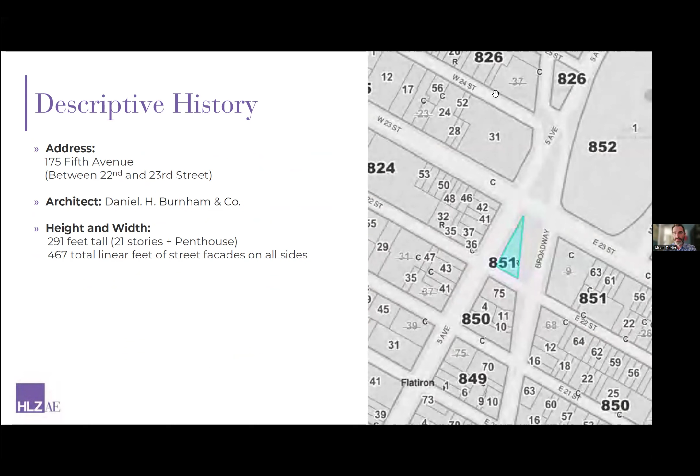I'll walk you up the building from the ground floor and talk about the materials. The first 3 floors are a limestone plinth course, which then give way to terracotta. There is an extensive amount of terracotta ornamentation on this building. It's in the form of lintels, sills, jambs, medallions, spandrels, keystones, and water tables. You can see the terracotta here.

In addition, the Flatiron Building does have quite a lot of brick. Most people don't think of the Flatiron Building as a brick building. It really doesn't read as a brick building from the street. It reads as a stone building or a terracotta building, and that was the intention of the original architects. Terracotta was actually created to mimic hand-carved stone.

Basically, when America was exploding with construction, we needed to build buildings fast, and we wanted them to look nice. In lieu of going to a quarry and pulling acres of limestone like they do in Paris, they went with terracotta, which mimicked the look of stone. Even further up the building, they did the same with brick, so the brick pretends to look like terracotta, and the terracotta pretends to look like stone.

Once you get to the 17th floor, it does go back to 100% terracotta, and that terracotta runs up to the 21st floor, which has the cornice.

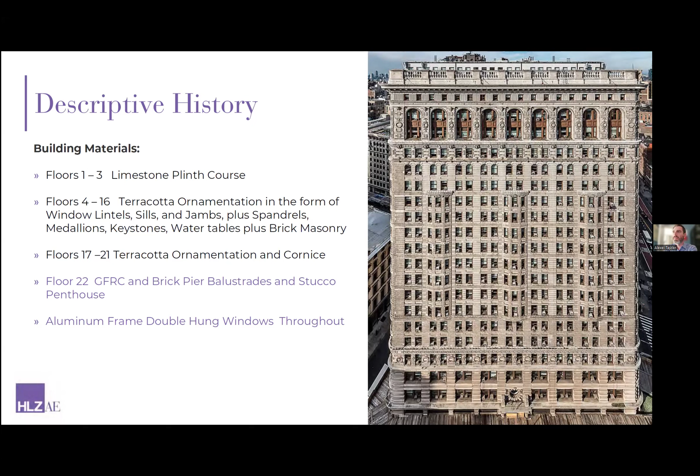At the very tip of the building, we have a GFRC brick pier and balustrade combination, and then a stucco penthouse, which you can see here with my cursor. Throughout the entire facade is aluminum frame double hung windows. So starting from the bottom, we have limestone giving way to terracotta, then terracotta and brick, then back to fully terracotta, and finishing with GFRC and stucco. A wealth of materials is present on this building.

In 1966, one year after the Landmark Preservation Commission was formed, it became a designated historic building. They found that it had special character, special historic and aesthetical interest, and value as part of the development, heritage, and cultural characteristics of New York City.

They said that, among its important qualities, it's an interesting example of an early steel frame skyscraper built on an unusual triangular site that, due to its prow-like effect and its northern end, creates an impression of great slenderness and height, displaying a wealth of ornamental detail representative of the time. Although a utilitarian office building—I love that line, a little bit of a slight, right?—it has inspired outpourings of almost a poetic quality.

The building itself has been an office building for over 120 years. The early tenants were the Equitable Life Insurance Society and the Imperial Russian Consulate, so it really dates the building there. In 1945, it was valued at $1.05 million. It's managed by Helmsley-Spear. The major tenant at this point was Macmillan Publishers, who were there up until 2019. In 1991, a restoration program was undertaken, and in 1997, Newmark and Company bought out Helmsley and did even further upgrades and improvements.

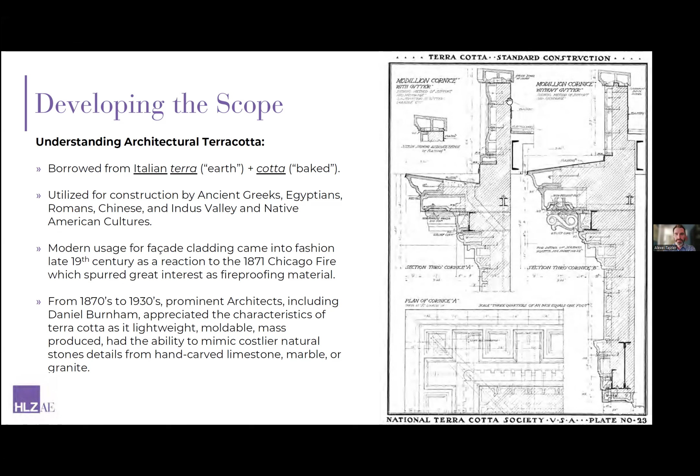So why does it fail and why do we always hear about it? Well, the sad truth is it's actually not the terracotta's fault. If you took that same clay pot from pottery class and put it in your backyard, and returned 10, 15, 20 years later, it would probably still be there in very similar shape. The issue is that terracotta needs structural support to be installed and stay on buildings.

And that's commonly done with iron or steel systems. At the turn of the century, really up until the 1950s, we weren't really waterproofing our buildings. We were just putting in steel, maybe painting the steel at best, and that was it.

So when iron or steel rusts, its members concurrently expand and weaken. The expansion is called rust jacking. What happens is the steel or iron, which is much stronger than the terracotta, gets larger and starts to push on the terracotta.

And after many, many freeze-thaw cycles, which we have in New York City all the time, it continues to be a problem to the point where eventually you get a crack, a little hairline crack, and then water gets in, freezes, that hairline crack gets bigger and bigger, and ultimately you have spalls that fall off the facade and land on the street or other building surfaces. Then we're into a public safety issue, which brings us back to FISP.

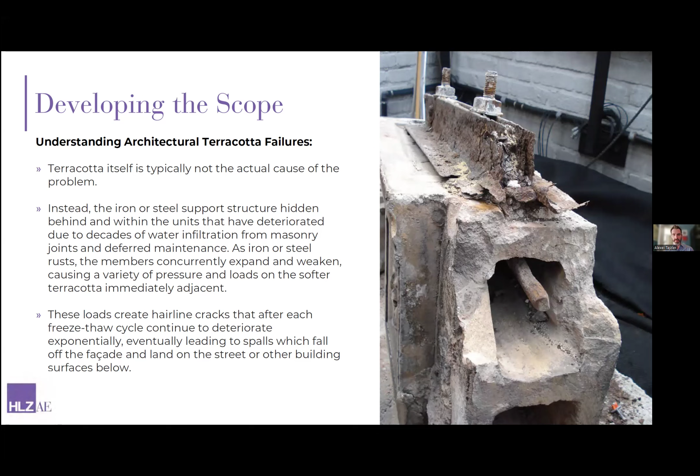So here are just some early photographs from the initial inspections. You can actually see the rope for the rope access inspectors in some of these photographs. You can see here, this is up at the very top of the building, this is the cornice.

We are always nervous about these types of cracks because the fear is that as these cracks grow, the triangles meet each other, and then you ultimately get spalls of a corner piece falling. Here is a previous crack that was done probably in the early 90s that is returning.

Here we have patches that have spalled out. This is the foot of the inspector - there is nothing between the foot and the street in this photograph. Here you can see stones, very highly ornamental stones, and kind of more plain stones here on the returns. Both have been patched many, many times before and are starting to crack again.

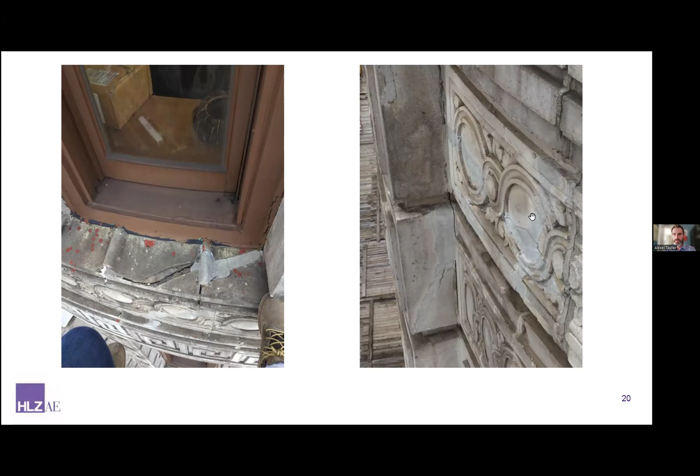And then at the brick, you have spalled brick masonry. Brick is a wonderful product, always has been. The issue is that the mortar joints are porous, and once water gets through the joints, they can sometimes be trapped and cause the brick face to spall. You most commonly see this on white brick buildings built in the city in the 40s, 50s, 60s, 70s that are glazed and are even worse.

And if you look at a lot of white brick buildings in the city, you will see a lot of brick repair being done continuously, also due to FISP.

And then here at the base, this is part of the limestone. You can see there are some metal anchors that were originally installed for awnings, for sunshades. They were left in place. And if you leave a piece of steel in a facade long enough, it will rust. And as it rusts, you can see a perfect example here, it will cause the surrounding masonry to crack. And that will only continue until they are addressed.

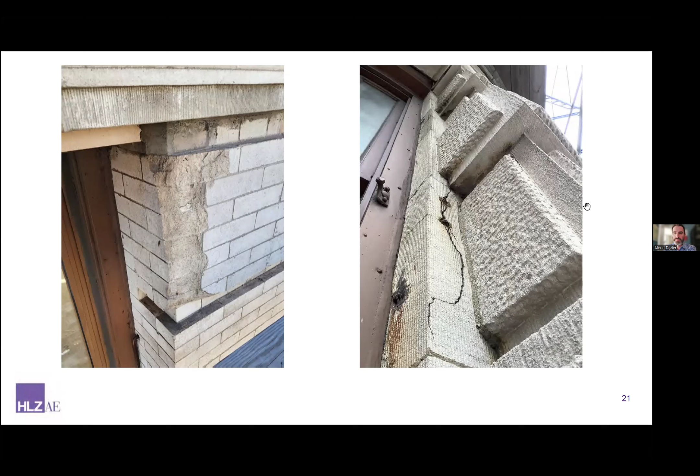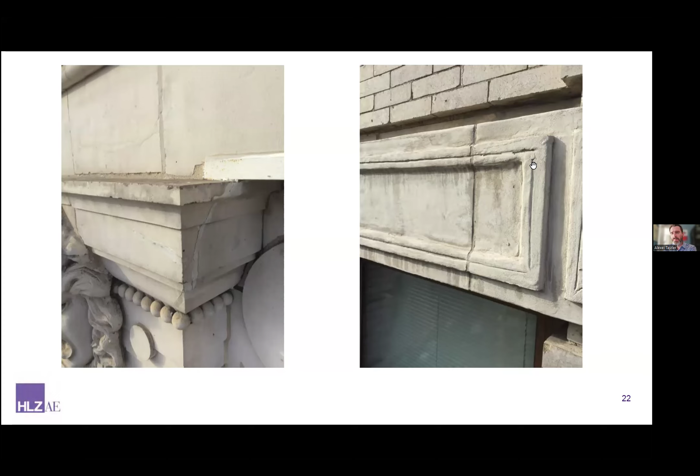Some other previous patches, crack repairs that were done, some steel supports that were added. This is kind of a smear coat to try to mimic the stone that was there. Not the best looking one.

Again, it's the facade. The Flatiron Building was just full of examples of this over and over again. Previous repair is done, and then another crack appears.

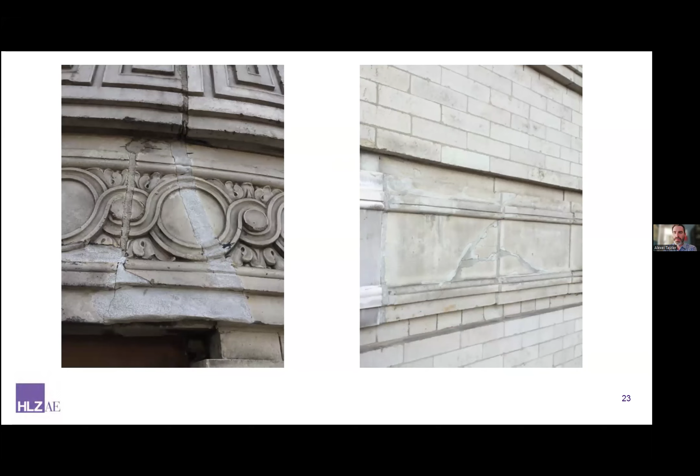Now you can kind of see where it would fall. It would fall a couple hundred feet onto the street, which is something that none of us want.

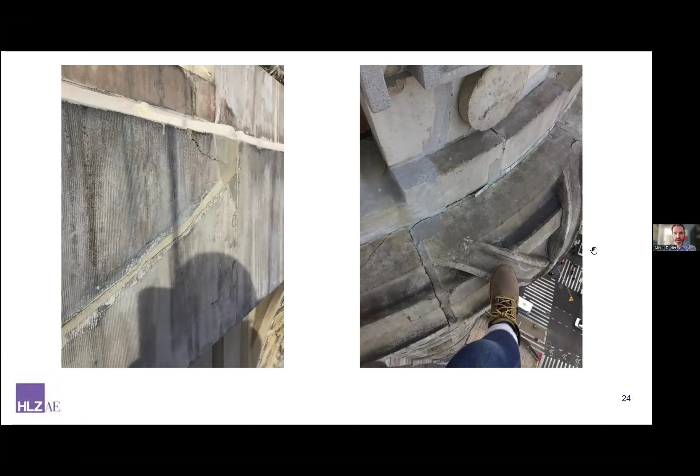And then at the very top of the building, we have the GFRC, which is also starting to show some cracks and some spalls as well.

So we have all these photographs, all these inspections. Now we have to move into actually developing the scope to the point where we can file with the city and bid it out to a contractor. In the industry, we call these construction documents, or most commonly CDs. They set forth requirements of the project. They include specifications and drawings that establish quality levels for the materials and systems.

We also created the bid breakdown, which is 50 independent line items over 134 pages. Our scope had no work on the windows or the storefront, though those are also being done by another consultant.

Once we had the CDs done, we had to file the projects with both LPC and DOB. We competitively bid it out to a list of qualified general contractors that work in the exterior restoration sphere, and ultimately AWR Group was awarded the project in spring of 2019.

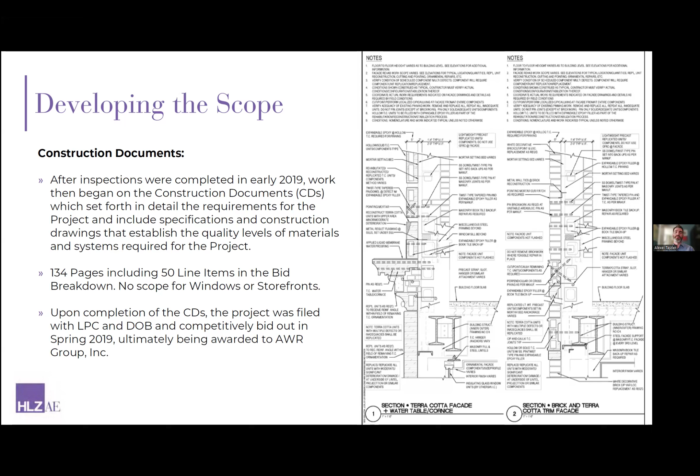So now we have a contractor on board. We can really start mobilization. And that first step is to put up pipe scaffolding. Again, everything before this was just done by rope access every 60 feet or a few little spots here. Now that we have pipe scaffolding plus some suspended scaffolding, we're actually able to look at every square inch of the building and really get an understanding of what is going on.

Our bids are built with allowances based off of our best guess and estimates with some contingency, but nothing replaces actually being on a building and being able to look at every square inch. So in order for us to keep track of that, we had to divide the building into a grid of individual facades, which I will get to on the next slide.

This task involved 15 employees across HLZAE, which had architectural, structural, and special inspectors. And then we also had developed an on-site field office, which was in conjunction with the general contractor, AWR, and Gladding, McBean, who was the terracotta vendor.

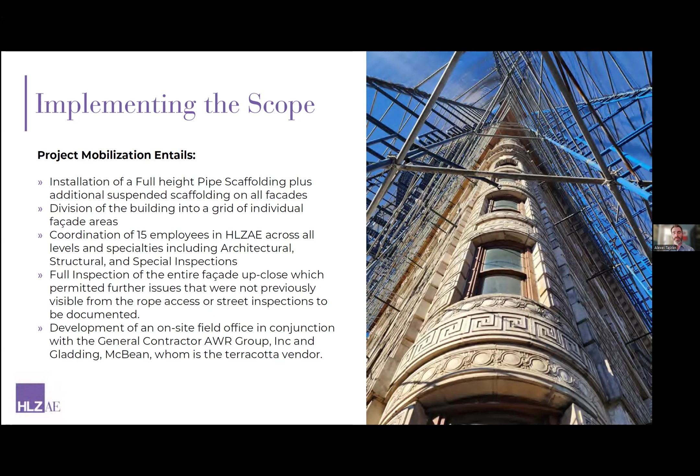And we have tablets that we use in the field. We mark a certain area that needs a tag, whether that's crack repair, unit replacement, sealant replacement, etc. And that is geo-tracked in software called PlanGrid, which is connected to the cloud so that we can look at it anytime at home, in the office, back in the field with contractors, with the client, etc.

As of today, we have 9,504 individual tags of some type of repair, and that includes nearly 3,200 individual terracotta units being replaced, 25,000 linear feet of masonry joints being repointed, and 2,000 linear feet of crack repair, among many other items.

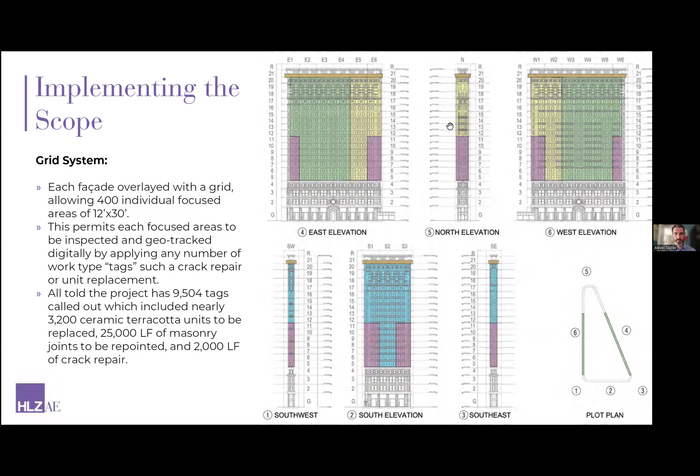So here's the pipe scaffolding. You can see this is along Fifth Avenue. You can see the kind of conditions that the inspectors and workers have to deal with. I always joke that this is an adult jungle gym. At the end of the day, stepping over these things starts to get a little hard on the legs and back, but this is the reality we have to deal with.

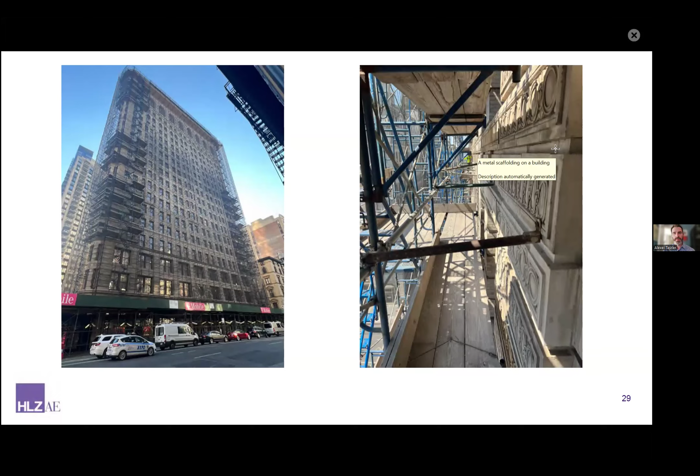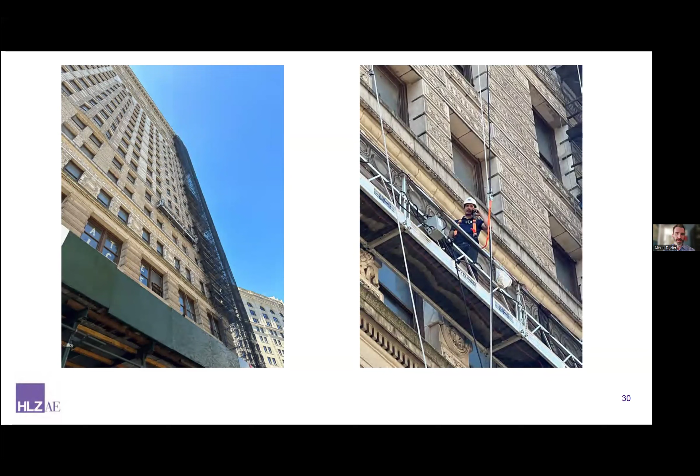Now, while we're on the building and can finally look at everything, we're able to do sounding. Sounding is commonly done with either a ceramic or rubber mallet, and we hit the stones with human force, and we try to register what we hear in comparison to other stones. It gives us an extra layer of knowledge and information that's beyond just the superficial, like a crack. Sometimes the stones even shift, which lets us know the stone is unstable and that the steel or iron straps behind are a real problem.

So a lot of times you have to do exploratory probes and find out things in real time. What is exactly going on? What was done before? Why is this failing? Why is this leaking? That's all part of the process once we have pipe scaffolding up, so we can safely open very large areas without fear to the public.

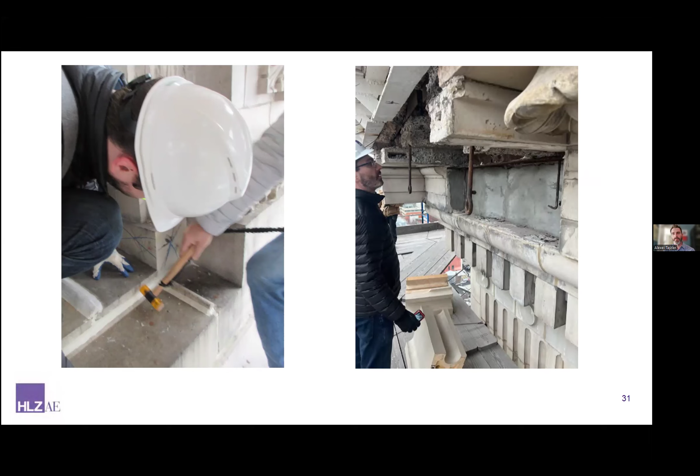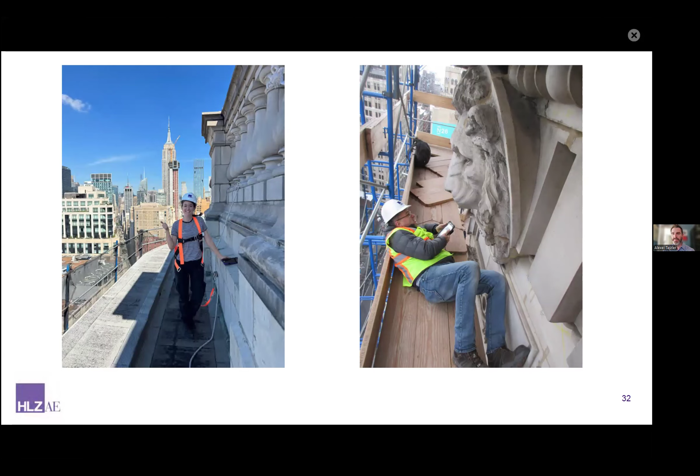So going back to terracotta, in a typical historic building, LPC passed rules that anything above the 6th floor, you can actually use replacement materials. Those are most commonly architectural precast, glass fiber reinforced concrete, which is called GFRC, or fiberglass. This is in part because there are only 2 vendors domestically, Boston Valley near Buffalo, New York, and Gladding McBean, which is near Sacramento, California.

They are the only 2 vendors domestically that can produce architectural terracotta with the trade knowledge and capabilities. So despite the fact that the Flatiron Building does have terracotta above the 6th floor, LPC still mandated that all unit replacement needed to be done in terracotta. We were not permitted to use replica materials, given the special architectural and historic character of the building. So it's sometimes a little bit of a double-edged sword. When you have a beautiful, famous building, you've got beautiful building and famous building problems as well.

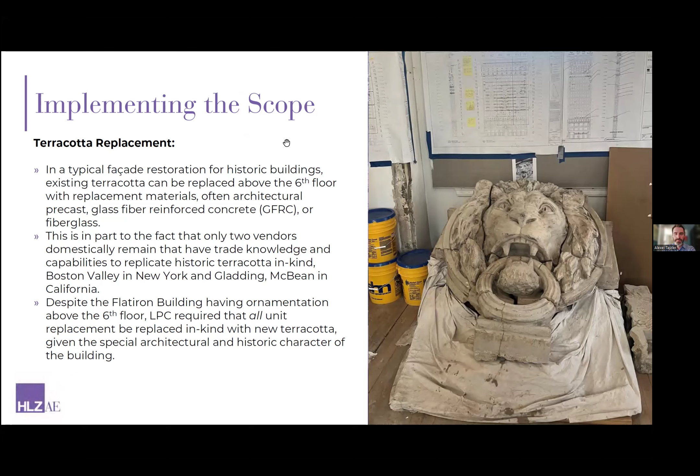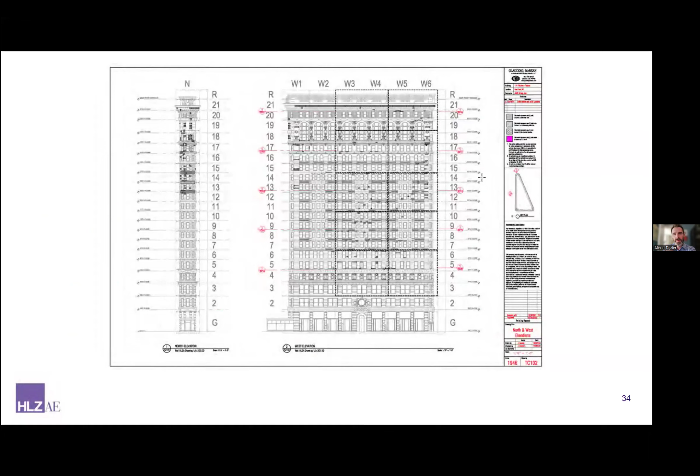So here are the shop drawings. Again, we're going back to the grid. You can see this is the west facade, all the floors. And when you break down the shop drawings, you can see just how many individual stones there are. Everything that is shaded is a stone that needed to be replaced. There's no pattern to it. Some floors are much better than others, and we have to go grid by grid.

Now, how is that done exactly? As much as the contractor would love to just take a jackhammer to this and get it going, he can't. We need these stones, because we need to replicate them exactly, not only the face, but also the backup, the webbing, the depth, all of that. So they are carefully taken out piece by piece so they can be measured and sent to California to have a mold done. I'll get into that later.

But the stones themselves, while they do have the steel support system, also support each other up and down with dead loads and side to side with lateral loads. So we can't just remove them and call it a day. We have to carefully shore the stones above so we're not causing further damage by replacing one stone. In addition, as I mentioned before, this building has no waterproofing.

These buildings, very common in the era, were called bonded masonry buildings, where basically the architects, developers and contractors would build a wall thick enough with the hope that any moisture or rain that came in would eventually evaporate before it made its way into the interior spaces.

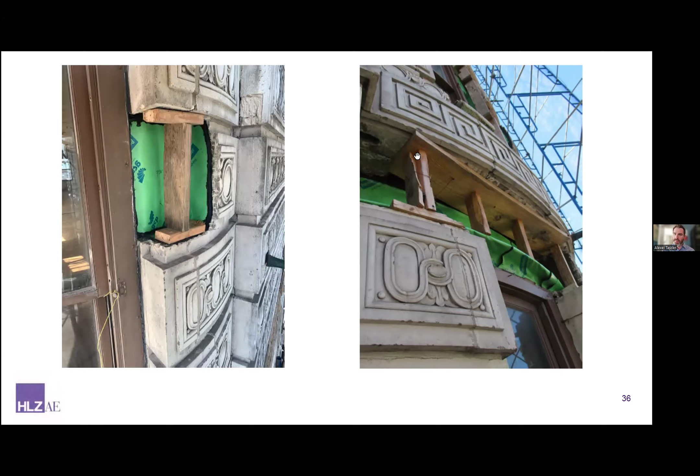By removing the terracotta, we have completely removed the main obstacle for water coming into the facade. We don't want to make the building any worse by doing this project, so we have to waterproof with peel and stick membrane, done at every location of the 3,200 stones we've taken out.

Here's our field office. You can see some shop drawings, and that's one of the lion's heads there. There's some materials. Because it's converting to residences, I like to think that this is probably the last office the Flatiron Building will have, which is a little bit bittersweet, but it's quite the honor.

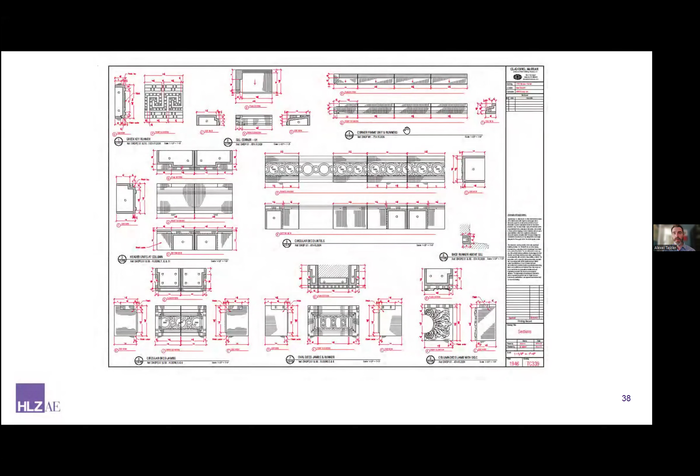Here are the shop drawings. You can see just the vast variety of styles, types, sizes of stones. These are kind of more flat fascia pieces, then we have some at the columns. Some are very ornamental, some are very decorative, some are not exactly 90-degree pieces either. We've got some radial columns, some concave, convex pieces, water tables, rosette stones, sills, lintels, etc. It just continues. Every inch of this building has something a little bit different, and each one has to be matched exactly.

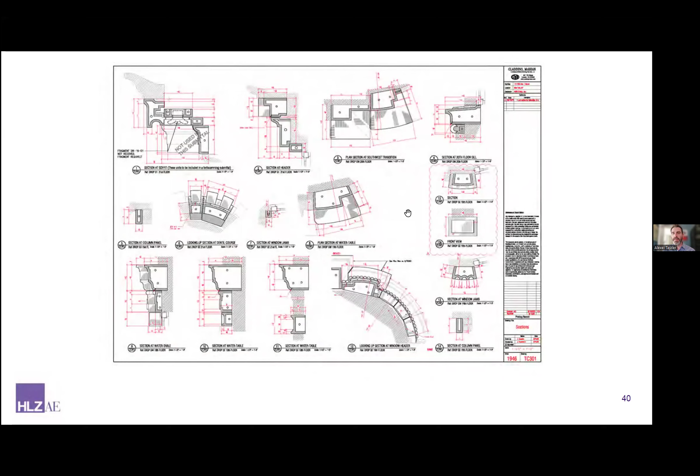Once the stones are cured, they then follow a QA/QC process to make sure they meet ASTM specifications and standards. And then the big issue is that due to industry backlogs, high demand and short supply, it can take 8 to 18 months to receive a single unit from when we first call it out for replacement. This is a major problem within New York City and elsewhere, and it's all because there's just 2 vendors left, and the lead times are extensive.

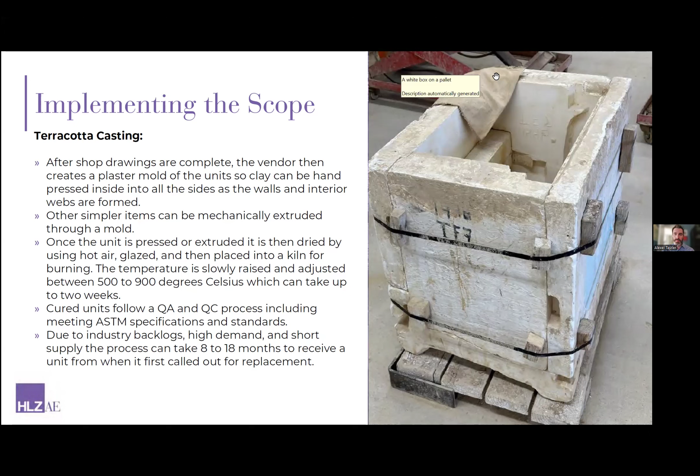And if you go with substitute materials such as precast, fiberglass, or even GFRC, you can get that locally, and we're talking a matter of weeks versus months. So unfortunately, with the Flatiron Building, as before, we have to go with terracotta.

So while that's all going on, we are still working. We're still doing architecture and engineering. The primary focus at this point is we're taking out the stones. How do we put them back in? How do we make sure that they are fully supported? We're not going to use the original iron straps that have all rusted out. We have to come up with modern technology.

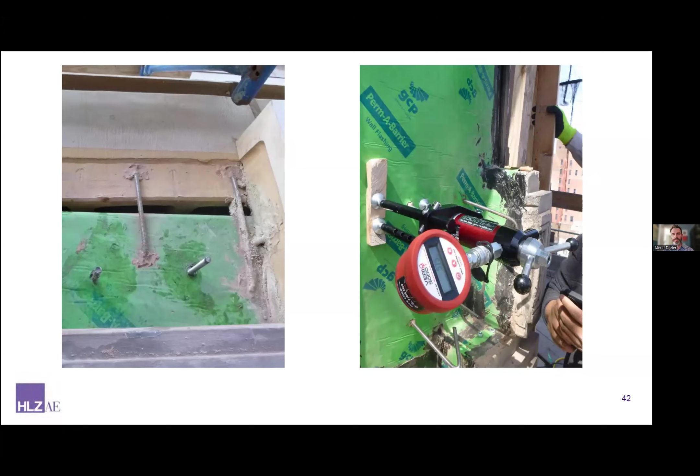We're also working with the vendor and landmarks to make sure that we are matching the stone as best we can. It's very difficult to match existing facades. I'm sure if you walk through the city, you can see where repairs have been done. The harsh reality is that even if you found the exact same stone from the exact same supplier, that stone hasn't been sitting outside in New York City for 120 years. So it'll be aged in its own way. But we do the best we can. We look at direct sunlight, indirect sunlight, shade, etc. Try to match the texture, any of the aggregate speckles as well.

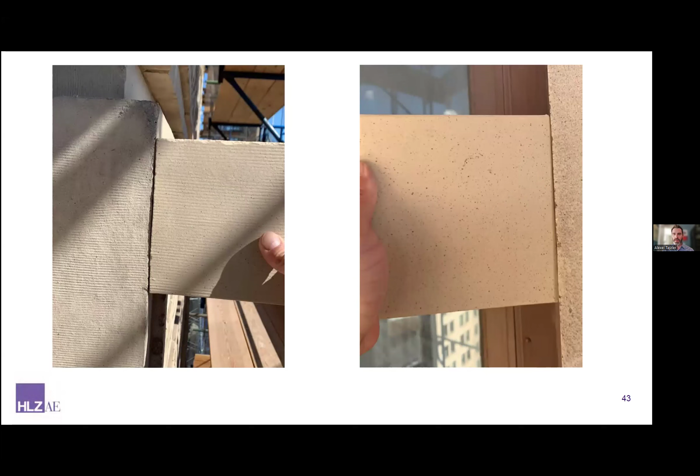So as these stones are made, they are shipped back to the Flatiron Building. The Flatiron Building has been vacant since Macmillan left in 2019, so there's plenty of space for us to store all of these stones. They are not outside, they're not in anyone's way, they're not going to get snowed on. Plenty of space. They're all individually marked and tagged, and they sit there and wait to be put back in.

That is done by hand, each individual stone. While the stones are heavy, they are still made out of clay. If you rest them on the side, they will fall. If you drop them, they will break. Men have to be very careful as they insert them. This one stone requires 4 workers and a foreman in the back watching, so you can understand the extensive process it takes to work on a facade like this.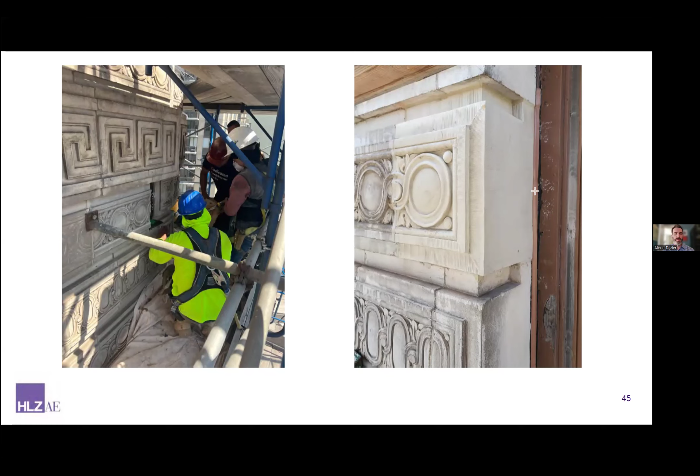So I'll show you some samples of stones that have already been put in. This is a collar joint at the columns above the terrace on 19. You can see patches were done in the past, and we thought it'd be better to just replace them entirely.

You can see this is the original here on the left. It's been repaired before, 2 cracks on the upper corners, another crack spanning between the two. And this is the replacement piece. You can see the level of ornamentation and detail that has to be matched. It's a very, very good match.

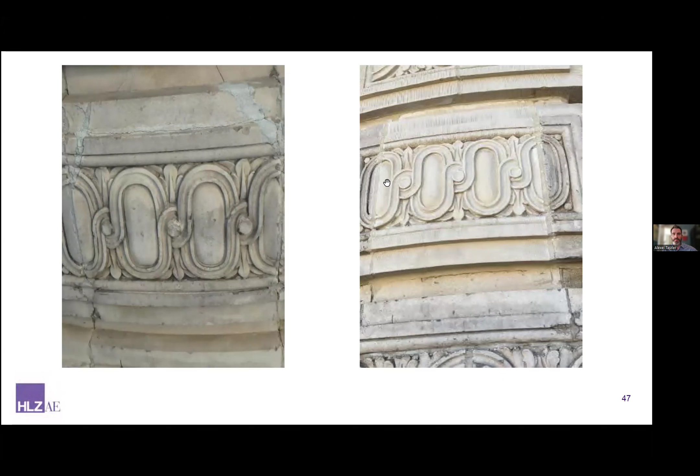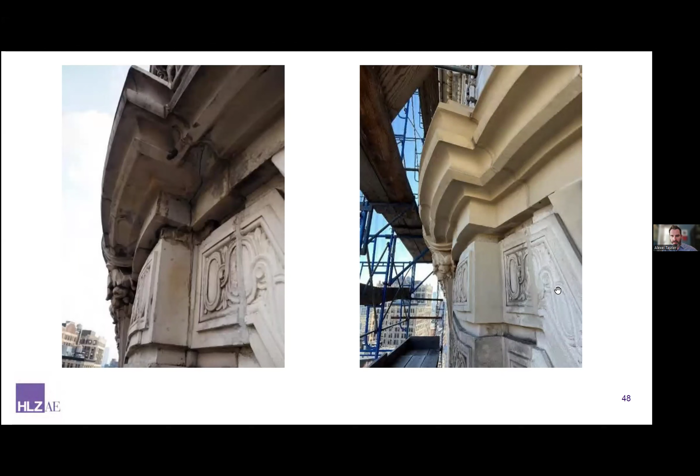At the water tables, the concave and convex elements are also installed and matched. Again, at lower levels, you've got some ornamental sides and some more flat fascia sides. You can see pieces here on angles. The building has everything. It just continues to have ornamentation.

It has medallions, rope bands, rosettes, lots and lots of things that I had to go to my old architecture books to find the terminology for. The Flatiron Building has it.

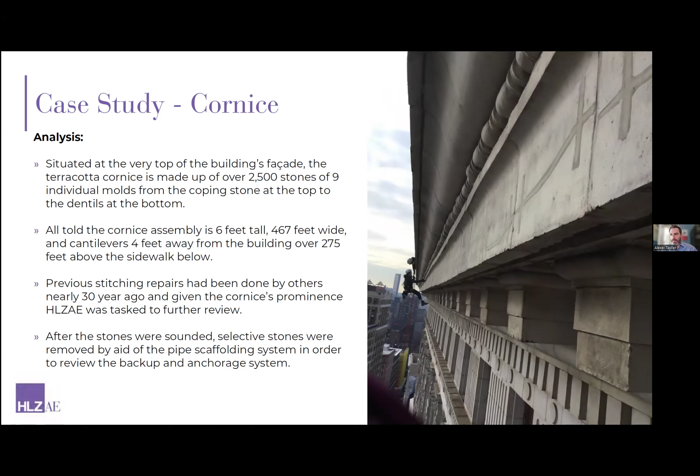We started to do sounding from our rope inspections. You can actually see an inspector doing it in this photograph. We did not like what we heard once we hit the stone with a hammer. So we decided once we had the pipe scaffolding in place that we could take out a few stones and start some of these probes and find out exactly what's going on.

So here is one stone that has been taken out, and you can see this 2x4 shoring going down to the platform that the photographer is standing on. You have the stitch repair, and a stitch repair is merely a crack repair where they add additional threaded rods in the facade. It's like a human wound, right? You get stitches. For a building wound, you can also do stitches.

They are great, they are common, but the caveat is that they're only as good and as deep as you cut. You can see here that the crack continues all the way through the stone to the back angle, which I will highlight on the next slide.

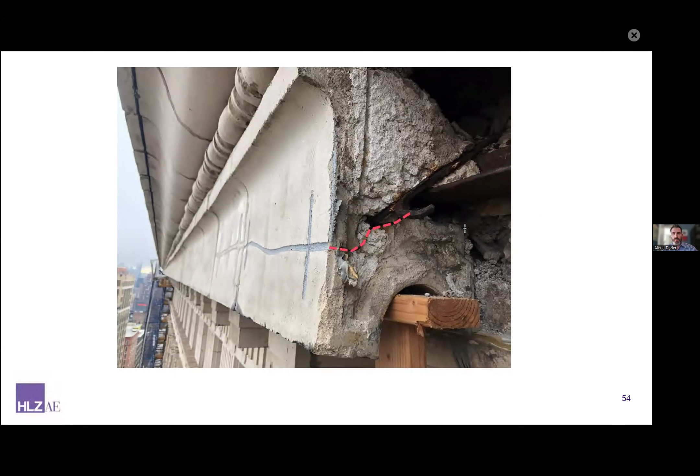This is a full depth crack, and it is one of the worst things you can find on a terracotta building. The reason for this in particular is that this stone is supported by the steel and iron members, and those steel and iron members are the angle up here and the steel strap here. And this crack, rather inconveniently, bypasses both of them.

So in effect, we have a stone this big resting only on this tiny little lip here and being held in place with the old 30-year-old stitches and the stones on either side. So a little bit too much friction being utilized here, and certainly something that we were not comfortable with, nor was our client. So the decision was made as we continued to probe elsewhere, we kept finding the same condition over and over again. We understood that the repairs lasted 30 years, but aren't going to last another.

So we have to then take them all out.

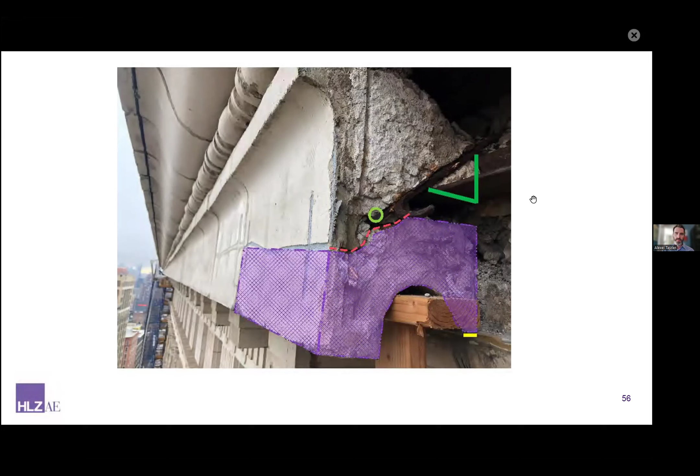So that is these stones here. It's 268 individual stones that need to be taken out without disturbing the remaining 2,232 stones within the cornice. So how that was done was tasked with AWR, and then we had to flesh out the logistics of reinstallation with the new terracotta pieces on a grand scale. The first step is to take them out without causing instability for the stones above.

We started a pilot program with some steel members, some angles. The assembly has this very large steel support system behind it, which thankfully was in very good shape, so we decided it's there, let's utilize it. We started to come up with some steel angles - you can see we did it vertically and horizontally. The vertical one was great because it supported the stone. The horizontal one misses it, but it has a better anchor point.

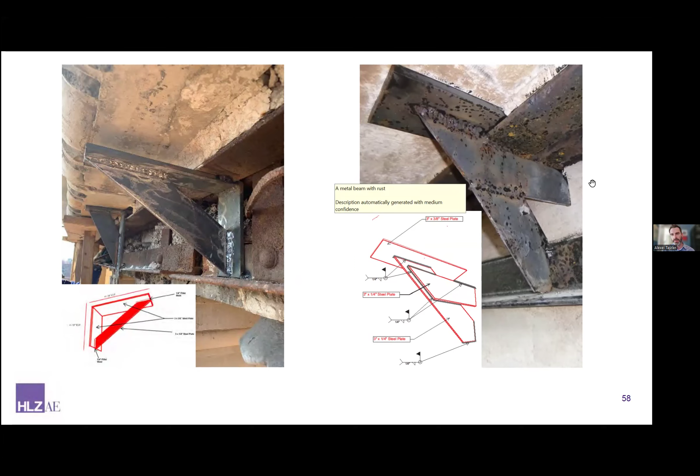So we ended up coming with a hybrid, which is this piece on a 45-degree angle. It's made out of 1/4 inch and 3/8 inch steel plates, and it's welded to the system. Effectively, men take out a stone, they install one; men take out the next stone, they install one, and it continues down all the joints. The system was great. The work has continued around all 3 facades, just taking out stone bit by bit and installing these new 45-degree angle braces, which supported the rest of the cornice directly above.

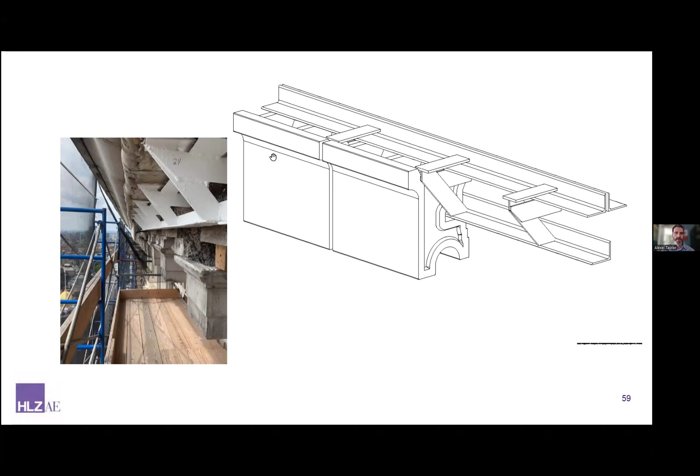Now that we have the stones out and they're being manufactured, we have to figure out how to put them back in. We're not going to use those old iron straps that rusted and caused all the problems - we need new modern ways. One of the ways we first proposed was: we have these 45-degree straps we just spent all this client's time and money on and engineering on, why don't we reutilize them for the new stones? Why don't we install a new vertical steel piece that's welded, drops down, and creates some type of anchorage with the stones? One of our first ideas was to create holes in the stones and run very large threaded rods through them, and they'll effectively hang on those and be part of the overall steel system behind.

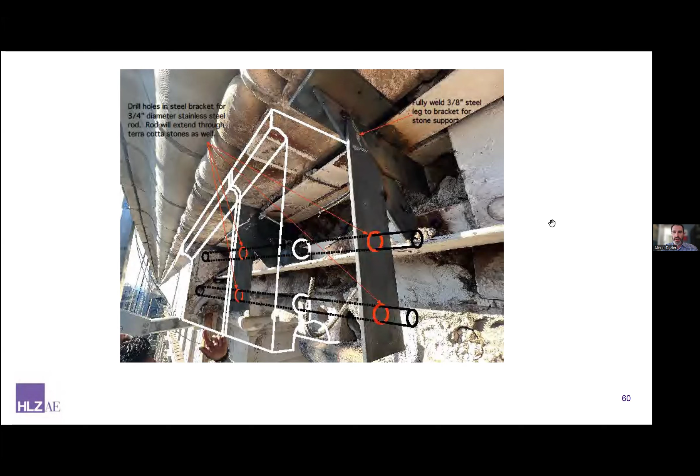So we got two in, which we were happy about, but then we immediately ran into problems. The first, a little obvious, is that the Flatiron has curved corners, not nice dead straight corners, and long threaded rods are not going to bend or curve. Secondly, every stone that comes back is slightly different in sizing, so it doesn't give us any tolerance or play when we try to put in the threaded rods, because the rods are the same size, but the holes and their locations might be off by fractions of an inch up, down, left, or right, and that's a major problem.

Lastly, this steel plate, while super strong and a great addition, the original stones never had anything like this in between at the joint. Unfortunately, this steel plate is simply too thick for the cornerstones. So we had to scrap the idea of the vertical steel plate entirely and come up with a different idea.

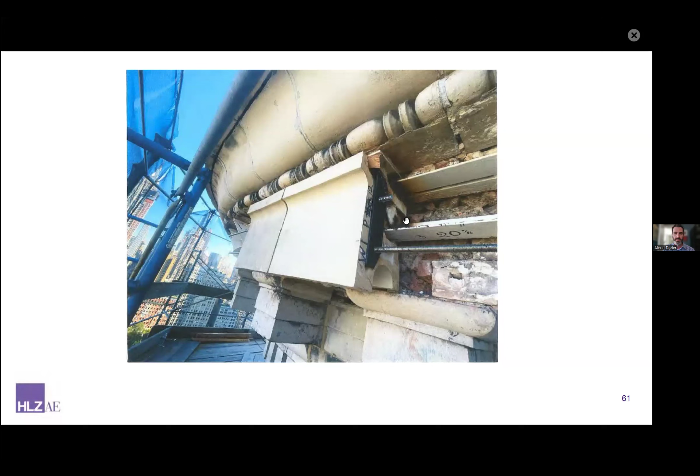So our next idea is to ignore the steel plate, ignore the brace, and go back to the original steel structure behind the cornice. Let's install new rods that act as hooks, which we can then pair with smaller threaded rods, 8 inches wide, giving a lot more tolerance and play for the installation. They can be slightly adjusted here and there, and we're not worried about a continuous band. Those hooks are then welded to the rods, which sit in non-shrink grout and are individually placed as the men continue to put the new stones back.

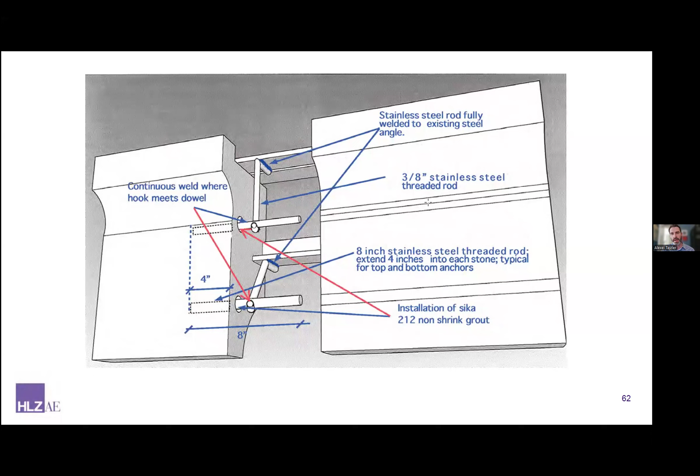You can see here's one of the first mock-ups we came up with - here is the new brace, here are the threaded rod hooks with the bars, it goes in, and it's also within the reveal here, so there's plenty of space. We don't have the plate over on this side like before, on the lip, which was part of the problem. Here we have plenty of space, we can fill that in. Not a problem - excellent, very happy about that.

So once we started to get the new stones back, we ran into another problem. These stones are not put in dead on. The men have to come in at an angle because they need to engage the bars. If you imagine putting it in straight, you've got these bars poking out, it's not going to fit. You have to come in from the side and slide it in, then continue to work your way in. So the brace that was originally there is now in the way.

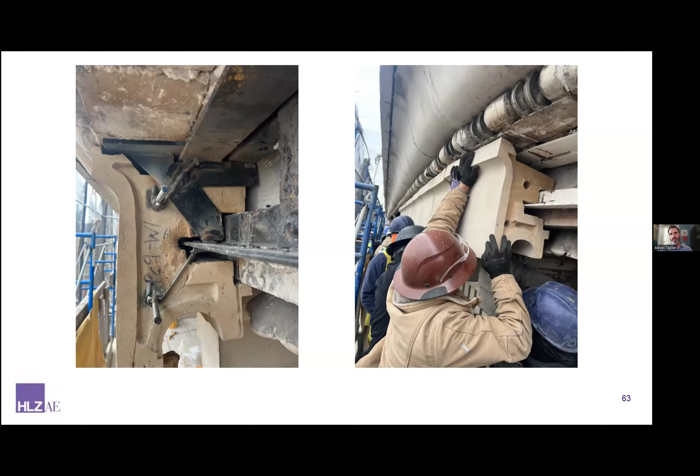So working with the structural engineers, we got rid of the 45. We came up with the dead 90. It's kind of similar to the original idea of dropping the vertical plate, now we're actually putting it back here. This basically allows us a lot more points of contact for the welds. It's a stronger connection, and with that we're able to continue to install and put the stones in.

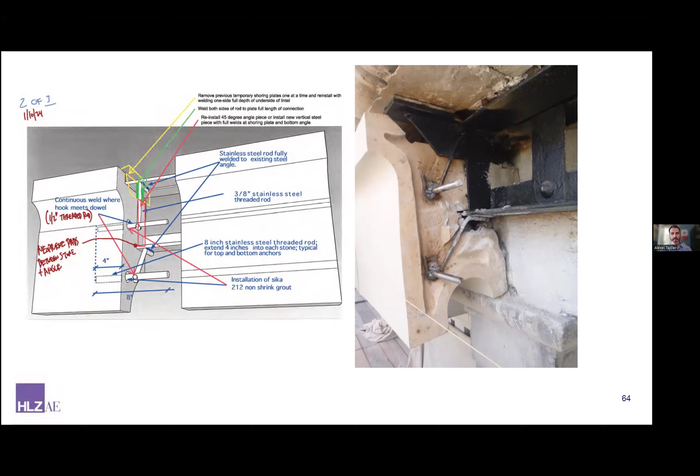And the stones have been going in continuously. Again, it's 265 stones, and I think roughly we have probably half of them in already. And to me, they look great. These are all brand new stones amidst the cornice.

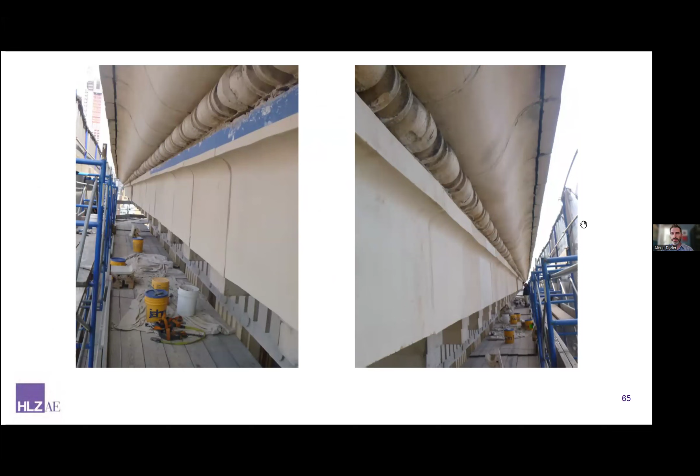Now, lastly, that's not the only stone of the cornice. We have other stones below it. We have those rosette stones, there was a shop drawing of that earlier. We have these very large stones that we call planter boxes. We have infill stones in between. Those planter boxes are supported by an eye bolt and a rod system. They have straps in between them. It's very complicated, and I would gladly get into the details of how those are installed, but unfortunately that's all the time we have for today.

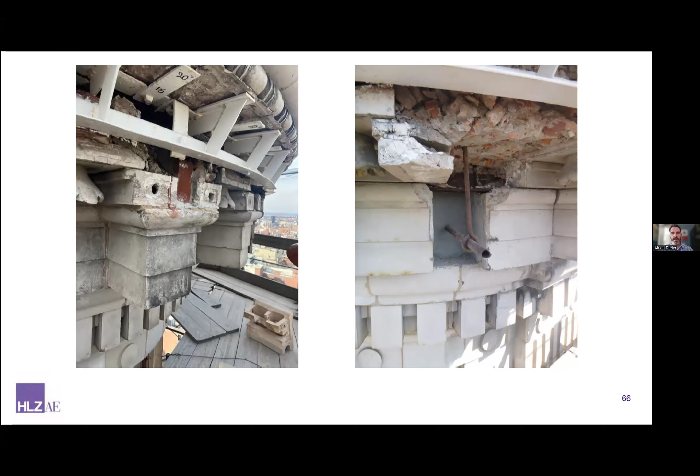One question is, how do you prevent this same thing from happening again? Are the steel structures now waterproof, or are they prepared in a different way? Yes. So any steel that remains and is still in good shape, which is very common even if it's rusted, can still be salvaged. It's scraped, primed, and painted. It's then waterproofed with modern materials. And then the key thing is that the new anchors that go back in are stainless steel, an alloy which does not rust nearly as much as regular iron or steel would. So the goal is, if you waterproof and put in far stronger, rust-prohibitive materials, you will get a much longer life out of the facade.